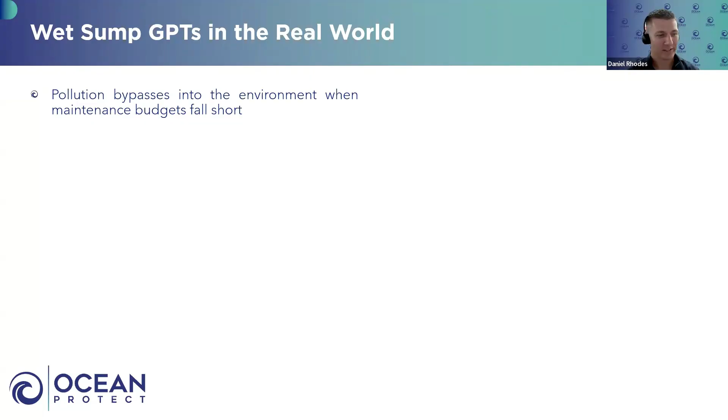Based on our data and what we've seen out in the field, turns out that this is happening 80% of the time. So 8 out of 10 devices are either non-operational or working at 20% or less of their intended function. There's the results. That's the challenge we're currently facing on the ground with our wet sump GPTs currently.

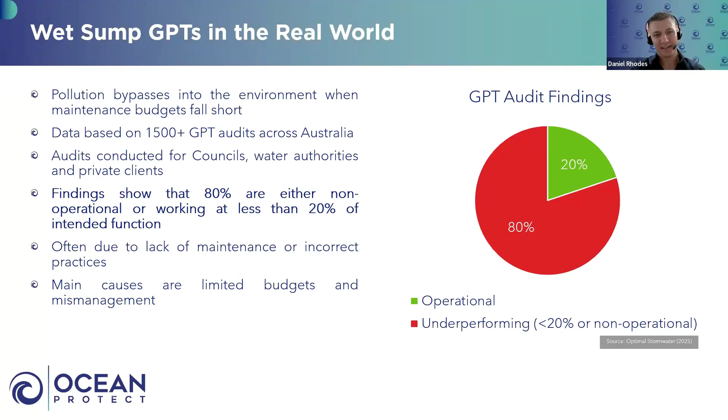I'm Dan Rhodes from Ocean Protect, and today is about GPT performance and dewatering. The idea here is how we can get practical solutions to get better outcomes on the ground.

The idea today is based on informing everyone, with a real focus on asset owners, about smarter water management. We're going to talk about the benefits and risks associated with dewatering on site, and how you can save some money, but weigh that up against the risks that may present themselves. We'll talk about the legality of the situation, what is the EPA's position on this. Then we'll talk about what on-site dewatering actually is, and look at the good, the bad, and the ugly when it comes to this practice. Finally, we'll talk about alternatives, because to be honest, you can't do this at all sites, but there are other ways as an asset owner to save money.

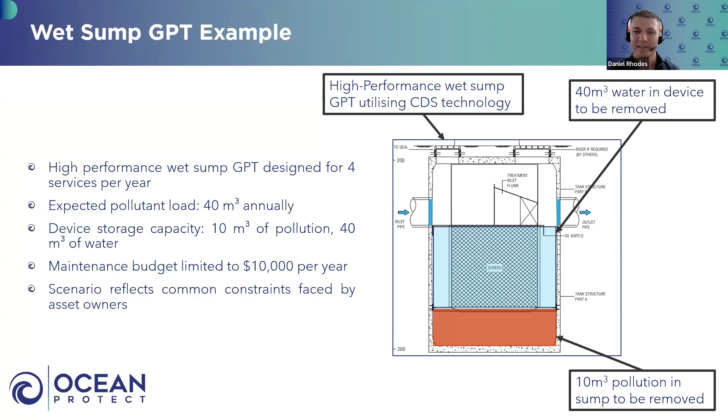So looking at two options to maintain this device, you've got option A. Cleaning contractor comes there, removes all the pollution and water from the device, and then drives that across town and disposes of it at a liquid waste treatment facility.

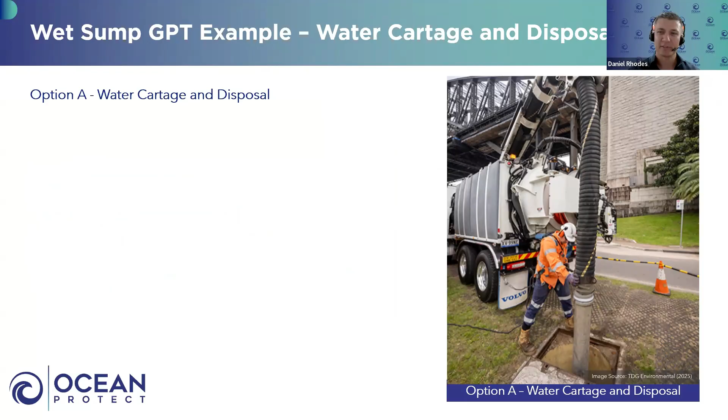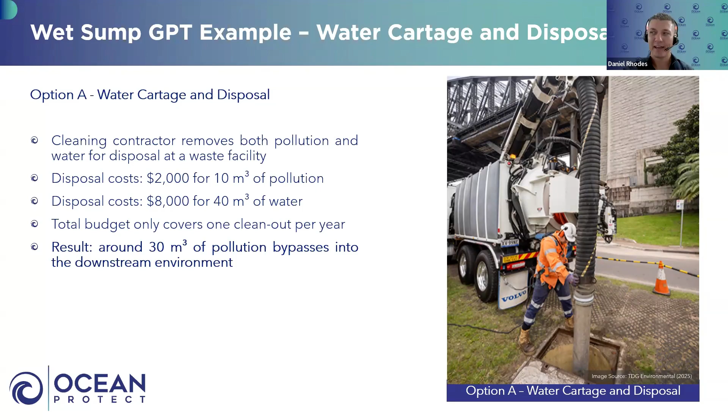Say you've got $2,000 to dispose of your 10 cube of pollution in the sump, and then you've got $8,000 to dispose of your 40 cube of water. So with this costing, you can only maintain this device once per year, meaning about 75% of the pollution off that catchment bypasses and enters the downstream environment.

It's not ideal. The second option is smarter water management, including appropriate on-site dewatering. With this, the cleaning contractor removes all the pollution and the water, similar to option A, but this time they dispose of the water on site in line with the guidelines.

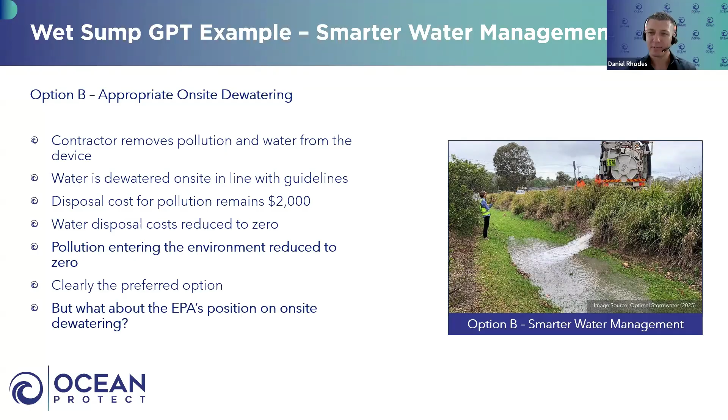So your cost to dispose of the pollution is the same at $2,000, but your water disposal costs are reduced to zero. Therefore, you can afford to maintain your device all year round, and therefore there's no pollution bypassing. So obviously option B is the more affordable option.

But if you do this, what are the risks? Can the EPA investigate you and fine you for polluting the environment?

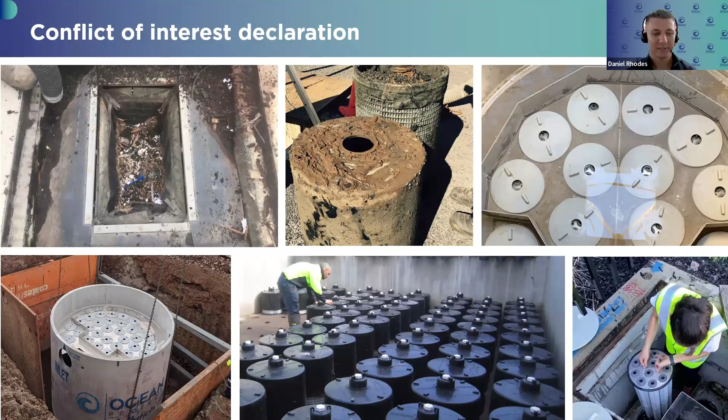So when we talk about what is a wet sump GPT, a high performance wet sump GPT, look for a real deep dive on this. Murray Powell, the general manager of Optimal Stormwater, has an excellent webinar on this, I think it was a couple of months ago, but I'll give the very abridged version.

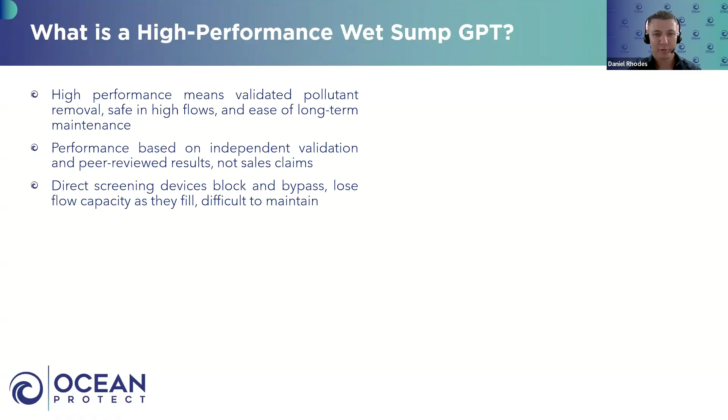So low to medium performing devices typically utilize direct screening technology, tend to block and bypass, and also store pollution in the screening area. The CDS technology avoids these problems as the screens are non-blocking, flow remains constant, pollution is stored offline in the sump, and it's easy to maintain.

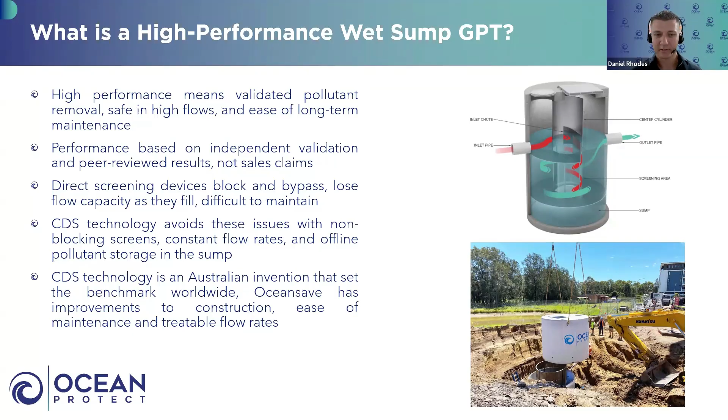The CDS technology patent actually ran out, I think in 2015. Since then, there's a couple of other suppliers offering this technology. Here at Ocean Protect, we have our Oceansave, which builds on this technology with easier construction, better access, and higher treatable flow rates.

I just want to take a quick look now at when we're talking about direct screening technology that stores pollution in the screening area, what does that look like and why is that an issue? So if we look over here, we've got a direct screening technology device.

Flows come in, it hits this back wall, goes down through the screens, gets treated, comes out the outlet, and away the treated flows go. So you can see here, the pollution storage area is 0% full. You have 100% treatable flow rate.

When pollution builds up in the sump, say we have 50% full, you can see that 50% of the screens are available to actually treat the water. So what that means is your design treatable flow rate is actually reduced to half.

And conversely, when you're 100% full, you have 0% treatable flow rate. So say we start at 100 litres a second, we work our way down to 50 litres a second to eventually 0. So it's important to say this because here's the real kicker.

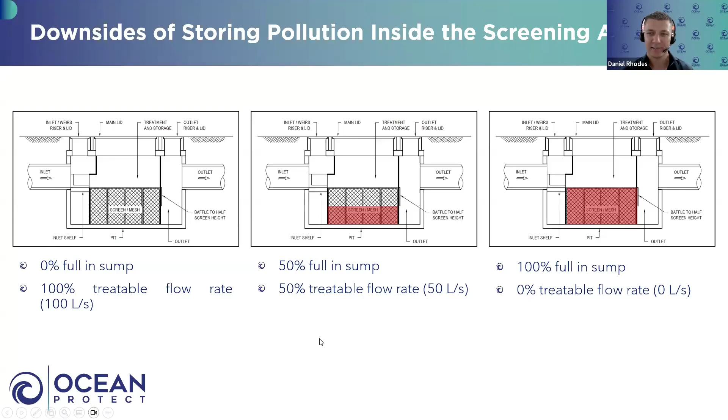MUSIC doesn't actually show this performance loss. So if you're a council DA staff or if you're approving any stormwater treatment device with a wet sump, just know that if it stores pollution in the screening area, then MUSIC doesn't actually show that. The industry is moving towards knowing this more, but it's just good to put it out there.

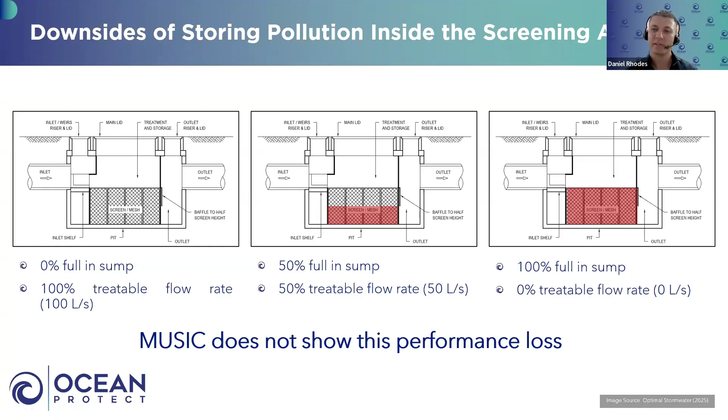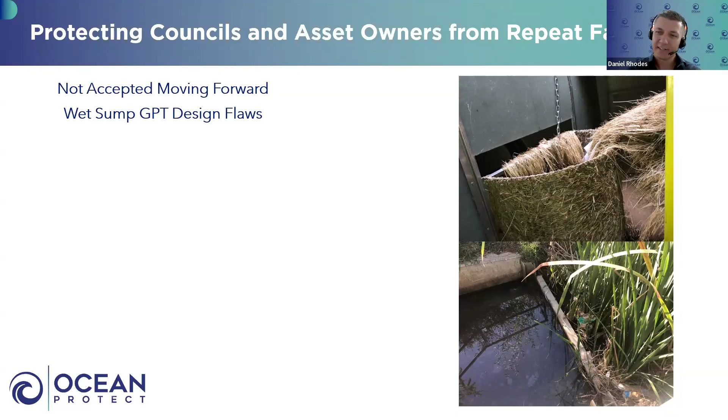If you're an asset owner and you're sick of receiving wet sump GPTs that just don't work, can't be cleaned, or are just storing pollution in the screening area, you can adopt design guidelines to rule them out. You don't need to name names or brands or products, but you can set clear parameters for what will not be accepted. There is a way to get away from these types of devices if they're causing you trouble.

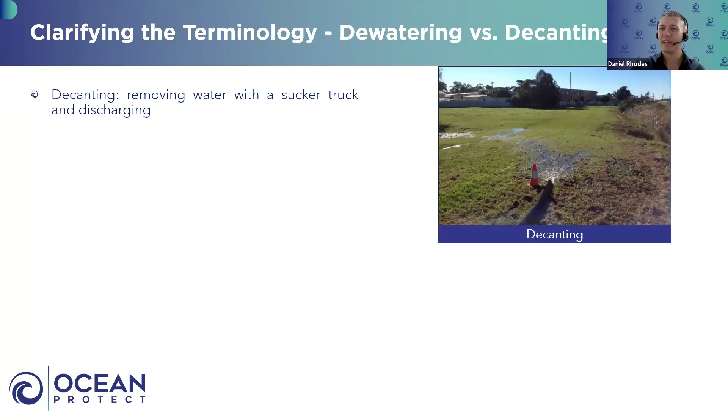With dewatering, I've got to clarify the terminology because I always get these backwards. Decanting is removing the water with the sucker truck, removing all the pollution and all the water from the device. At the back of the truck they've usually got a 1 mil screen, and then they pump it out appropriately on site. That's decanting. Dewatering is using a pump, putting it on top, pumping down the supernatant water, and then disposing of it on site. So, because I always get these mixed up: decanting, truck; dewatering, pump.

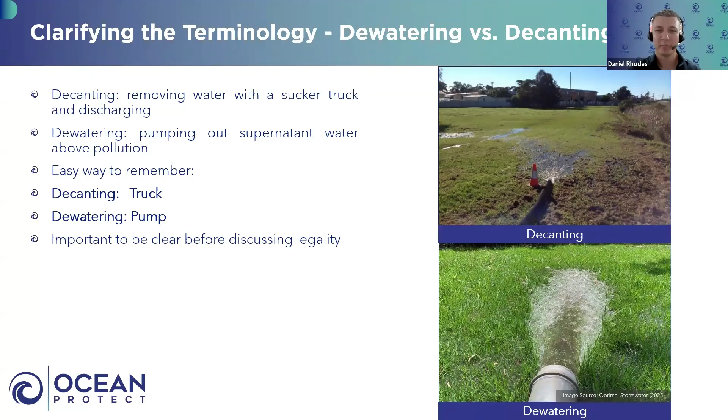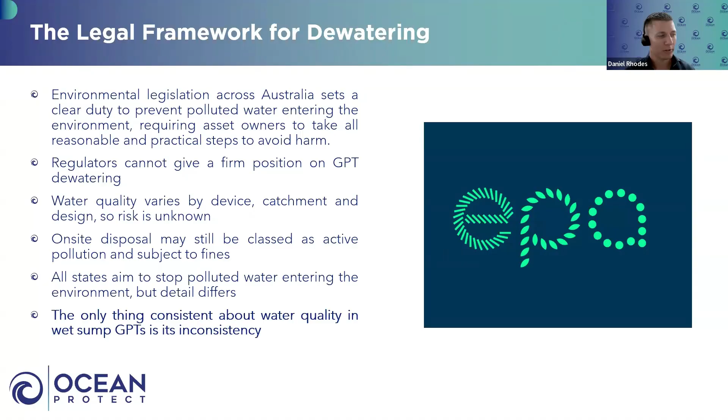Each state and territory has its own legislation, but the intent is essentially the same: to stop polluted water from entering the environment. In New South Wales you've got the POEO Act. In Queensland you've got the Environmental Protection Act. But for dewatering GPTs on site, regulators can't actually give a firm position because pollutant levels are going to vary between device to device. When was it maintained last? Has it gone anaerobic? What's in the catchment? So without water quality testing of this water, the risk is actually unknown, and on-site disposal may still be treated as active pollution. The only thing consistent about water quality in wet sump GPTs is its inconsistency.

Now we've got to ask the question: what is legal really? What do the acts and regulations actually allow? If you drive a car on the road, it's technically illegal under the POEO Act, as the particles from your brake pads get on the road, get washed into the stormwater system, and that's actually considered pollution. You've got leaves in the gutter - council owns the gutter, and is therefore legally liable for pollution when it rains next. Here's the real kick in the guts: having a device that is overfull and is allowing pollution to bypass, that's illegal.

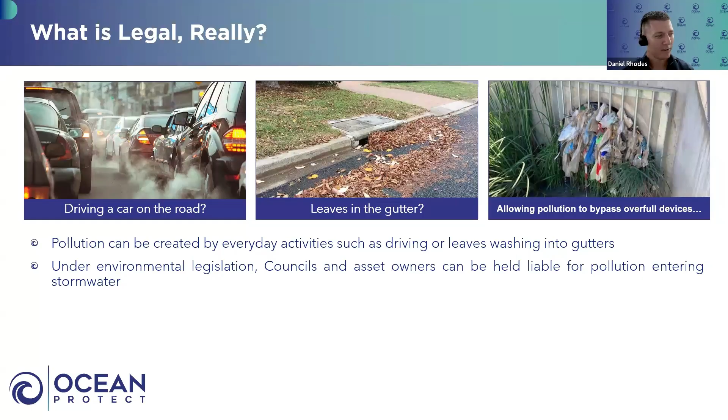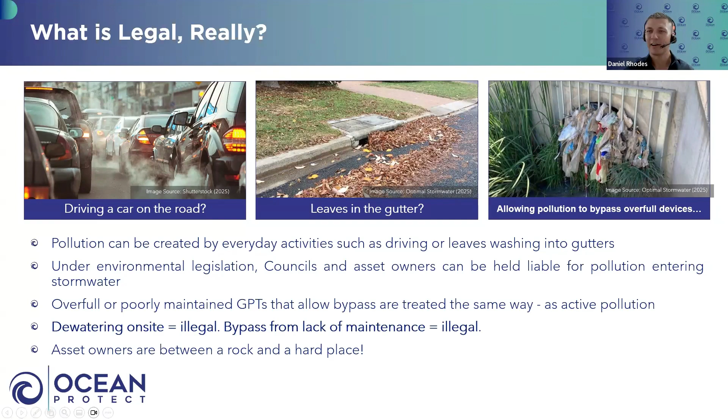So in summary, dewatering a device on site is illegal. Because of this, you can't afford to maintain your device, which means pollution will bypass - that's also illegal. So I usually give this talk and we say asset owners are stuck between a rock and a hard place, because you're damned if you do and you're damned if you don't.

While the acts are absolute, the way they're enforced is a big grey area. Regulators want to achieve the best environmental outcomes possible, and our experience is if you're a council or a water authority or a private owner who's doing everything practical in their power to follow best practice to minimise pollution, they're almost always looking to support you, not prosecute you.

A little bit of a yarn here - a good example of this came in late 2023 down in Tasmania.

We had the EPA working with Hobart and Glenorchy City Council and the water authority down there, TasWater. Optimal Stormwater was the industry representative, got everybody in the room and said, look, we have an issue and we want to get to the bottom of it. So the issue they had was they couldn't clean any of their GPTs because the EPA had a strict requirement that everything needs to go to a liquid waste treatment facility, all supernatant water. So they're removing everything from the device and then driving an hour across town to dispose of it.

So after this meeting, while they couldn't write a new law, the Tasmanian EPA formally condoned on-site dewatering if strict safeguards were met. These included following the guidelines, discharging only when there's a 30-metre vegetated flow path, and having site-specific documentation. So this was a pragmatic first step that set a national precedent, showing how regulators and industry can work together to find a practical solution to still protect the environment. It's pretty cool.

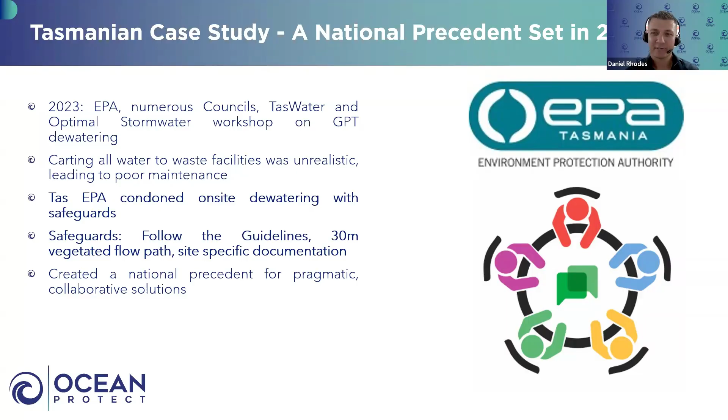So now I'm going to talk about what those steps were. There's about 6 steps that need to be followed in order for this to actually occur on site.

The first cab off the rank is the national guidelines for the maintenance of stormwater treatment measures. It's an absolute mouthful, but these guidelines are really the holy Bible for GPT maintenance. Out in the field, there's over 80 different types of GPTs - legacy devices, current models - and they all function differently with their own strengths and weaknesses. So these guidelines explain how each of these devices work, how to monitor, how to regularly clean, how to comprehensively clean, and they have a whole section on dewatering.

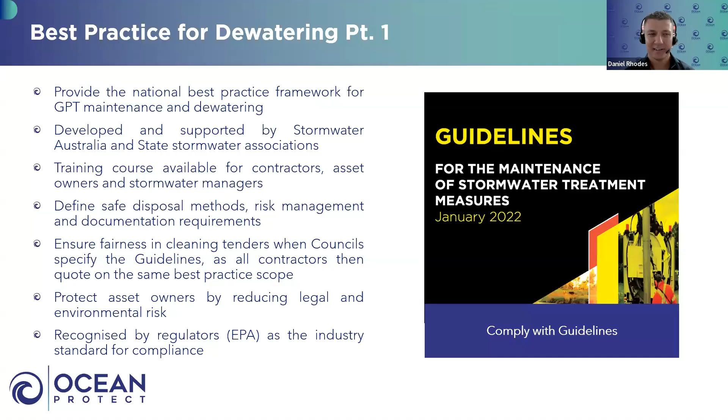These guidelines were developed by Stormwater Australia and the state stormwater associations, and there are training courses available through your state-based associations. I think we have a few people from Moreton Bay Council here - they were actually the first council in Queensland to be trained in this, and they're currently leading the way.

A key safeguard in best practice dewatering is that the discharge has to go through a 30-metre vegetated flow path. Down in Tasmania, the EPA made this a requirement, but there is a big caveat to this, and we're going to get to those other requirements shortly.

We have noted that some cleaning contractors have dewatered directly over the diversion weir or directly downstream. It's important to note that this is a clear breach of the EPA's requirements. So the 30-metre vegetated flow path, if appropriate for that site, must be treated as non-negotiable.

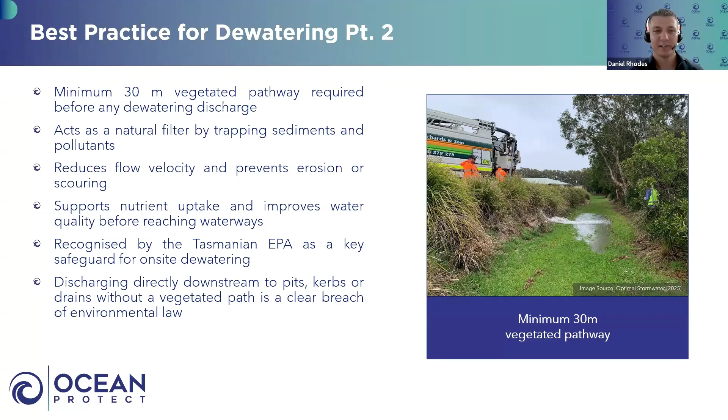Now, the site-specific cleaning specification is one of the most valuable outcomes from an audit conducted in line with the national guidelines for the maintenance of stormwater treatment measures. Essentially, it condenses everything into a one-page document for that specific GPT - how to monitor, how to clean, and how to dewater, if appropriate, at the site. In addition, it makes cleaning tenders fair and consistent because every contractor is quoting on the same scope of works.

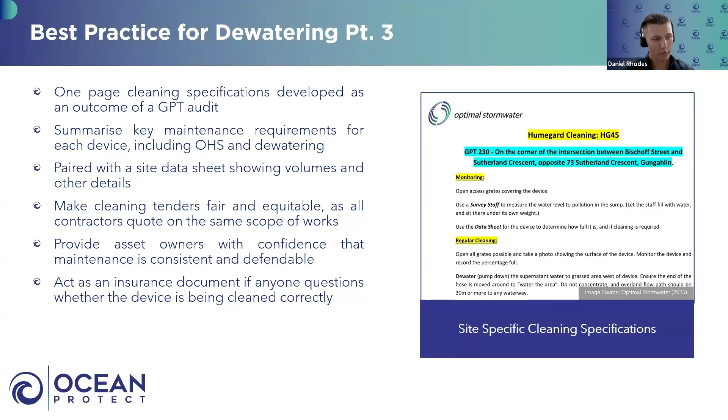Before I worked in the industry, I would have 100% thought this was the worst. You see a combo vac truck out in a park pumping brown liquid onto the grass, and you just think, what the hell's going on here? So that's why signage for this is so important - it makes clear that the activity is authorised and safe, and that, backed up with the cleaning specification, acts as insurance for the client and the cleaning contractor.

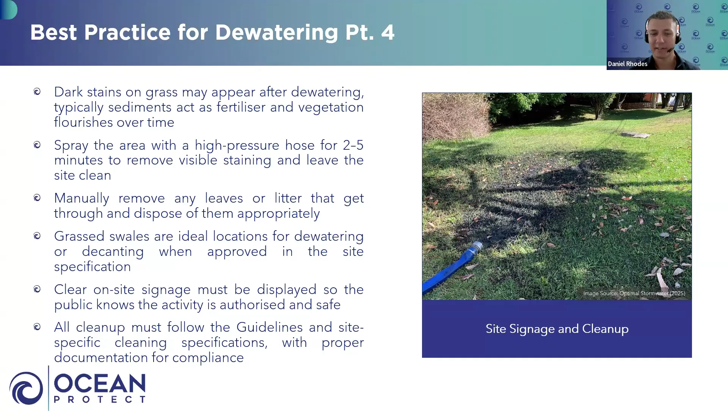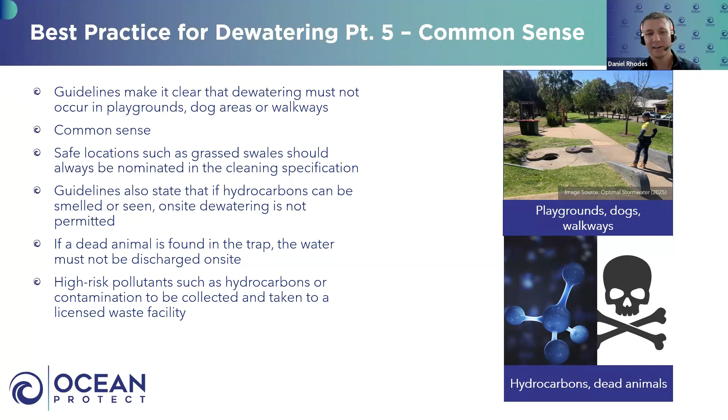When I was talking before about common sense, it is spelled out in the guidelines. So you would never obviously dewater near a playground, a dog off-leash area, or a walkway - the risk of kids, pets, or the public coming into contact with the water is obvious. Same goes for hydrocarbons or dead animals. Sometimes you lift the lid off a device and you just get smacked in the face by the smell of hydrocarbons - obviously, you can't dewater. If you open the lid and see a dead carcass in the supernatant water, you can't dewater. So this is common sense, but it's in the guidelines, put in black and white, so there's no grey areas.

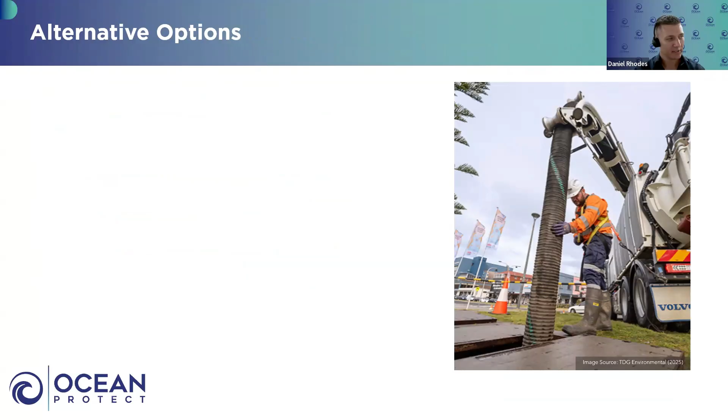So what do you do if you're on site and you can't actually dispose of it on site because none of those requirements were met? Very quickly, you can discharge to the sewer if council is the water authority. This is really good for regional councils - somewhere like Eurobodalla Shire Council, where they're the water authority, if they get internal approval, they could dispose of this supernatant water directly into the sewer manholes.

Now, if you're Brisbane City Council or City of Sydney Council with Sydney Water, this is obviously not going to work because you'd need a trade waste agreement, and it's not worth it.

You can decant back into the device when you finish cleaning it if it's a regular clean, but in a comprehensive clean as per the guidelines, you can't do that. You can decant to another treatment measure nearby if suitable.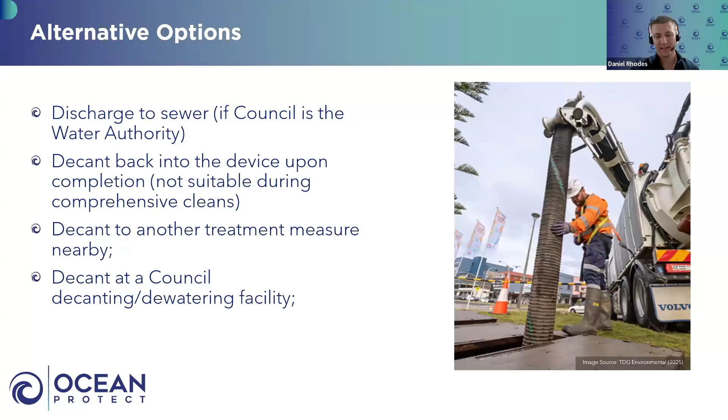You can decant at a council decanting or dewatering facility. What's that? It sounds like a fancy term for an area allocated by council where you can discharge this water, it can evaporate, and then once the water gets out of it, you can dispose of it.

You can decant at a council depot into their truckwash or oil/water separator, or send it to a leachate controlled landfill if council owns that landfill and they have internal approval. Good way to save money there.

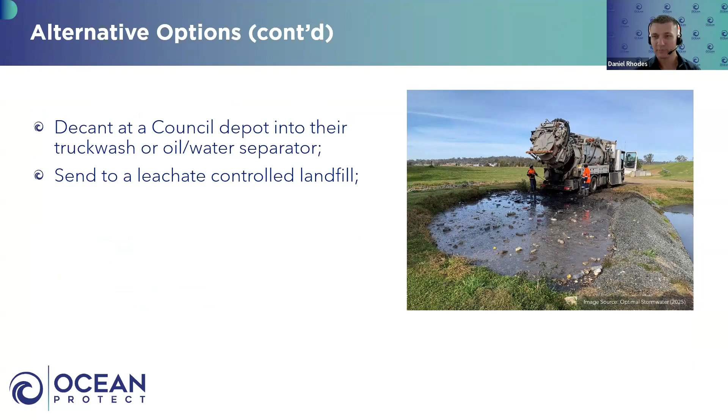You can go to an irrigation area off-site, but the last option should be going to a liquid waste treatment facility. Unfortunately, if the client isn't aware of this, the cleaning contractors know this - not to throw them under the bus - but this will most likely be their first option because it actually makes the most amount of money for the cleaning contractor.

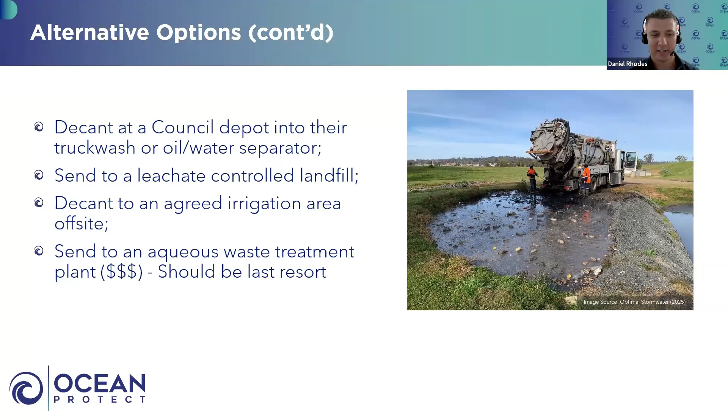How can we do better? So the EPA's decision on dewatering is a step in the right direction. But if your back's against the wall, you don't have a lot of options, and your maintenance budget's small, there are risks associated with it. You can mitigate those risks, but there still is risk.

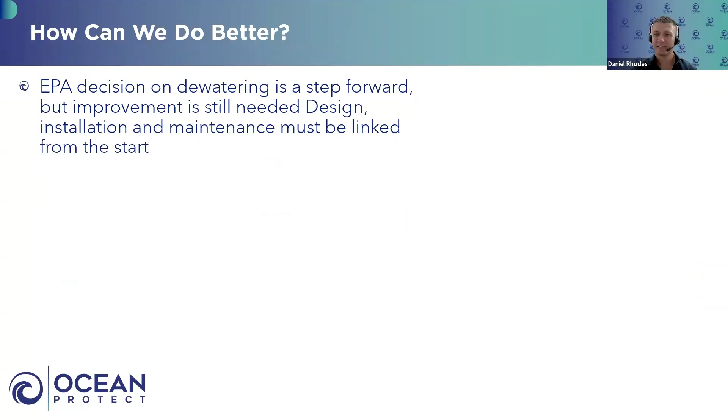Since joining Ocean Protect about a month ago, I've learned that in-house we run everything through a jellyfish filter. The idea behind that is stripping out sediments, nutrients, and hydrocarbons. This is just the way the industry is going. I know we're not alone in this - other companies will be doing their own thing - but this is a good example of taking those requirements a step further to decrease the risk to the environment.

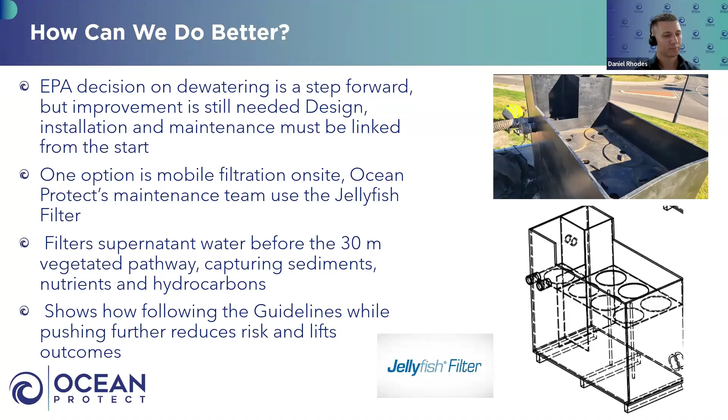All right, getting towards the end. I'm Dan Rhodes from Ocean Protect, and if you haven't guessed already, my specialty interest subject is GPTs. But if you only take one thing away from today, let it be this: smarter on-site water management will manage budget constraints and improve environmental outcomes.

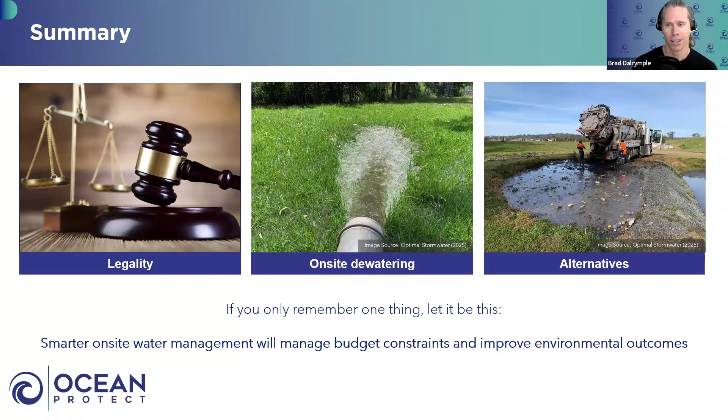I think we now have time for Q&A and looking forward to answering any questions you have. Thank you so much, well done Dan - first presentation under the Ocean Protect banner and loving the backdrop. We've had a couple of questions come through, but don't be shy if you've got a question you'd like to ask Dan, even if you want to fess up that you thought what you were doing is actually illegal - that's okay, there's no judgment here, I won't judge you.

One of the early questions was from Daniela Garente, who I think wins the best name award for today. Daniela is from Kingston City Council in Melbourne. Daniela says the majority of councils in Melbourne dewater GPTs into the downstream pits, which is EPA approved. She says she doesn't know any council who takes the water to a disposal site.

We are actually trialing dewatering into open areas, option B as per Dan's slides, since we are at the end of the catchment with our stormwater ending up in the bay, but are currently testing the quality of the stormwater. I don't believe any other council in Melbourne is doing this. So to your point before, Dan - just to clarify, Daniela says the majority of councils dewater GPTs into downstream pits and says it's EPA approved. It might be, but from your perspective, should it be, or is it legal?

Well, there's no actual legislation saying thou shalt not dewater into the downstream network, but there is an open-ended requirement in all the EPA's guidelines that it needs to follow best practice. So to minimize risk, if you're pumping directly downstream into the stormwater network, that carries a high amount of risk. When you're trained in the guidelines and have site-specific documentation telling you where and how to dewater with a 30-meter vegetated flow path and potentially other measures like the jellyfish filter or whatever competitors use to minimize this risk - if you're following best practice and taking all practical steps to reduce this risk, then you'll most likely be supported.